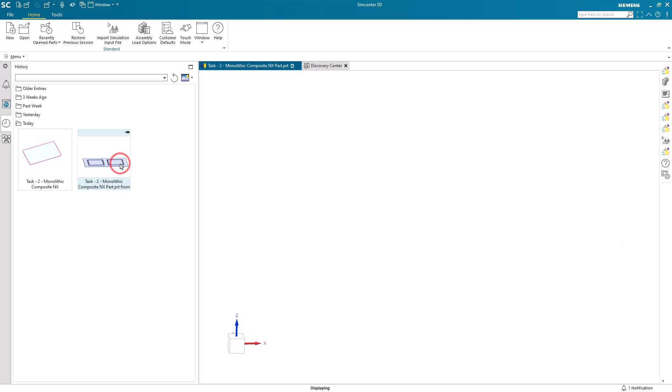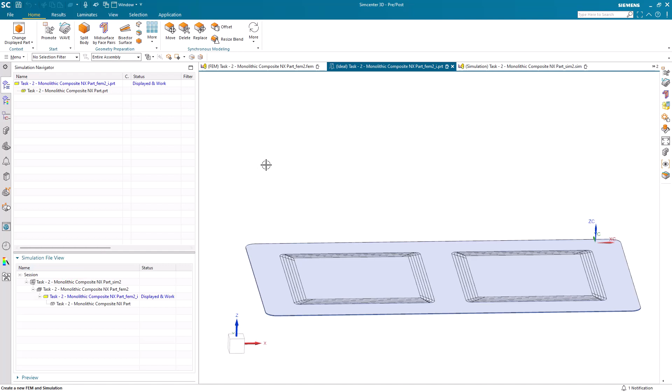Today we'll be importing plies from FiberSim onto a mapped mesh. We'll begin by creating our simulation files. We'll also create a test solution, linear static, and we'll begin in the idealized part where we want to create a surface that's divided by the ply boundaries.

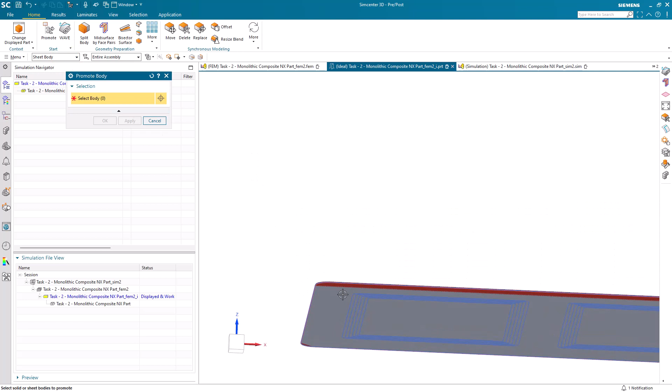So here you can see we have the plies being built up from the bottom in the Z direction. So what we'll do is we'll start with the bottom surface, and then we'll get some curves that we can use to divide up the faces by the ply boundaries. So here I'll use promote to get our bottom face sheet body.

And here you can see there are a number of curves that are also on that bottom face. There are actually a number of duplicate curves, and what we want is a spline which forms a complete perimeter. So here we'll use some detail filtering in order to select just the splines. That will reduce the number of objects that come up in our quick pick.

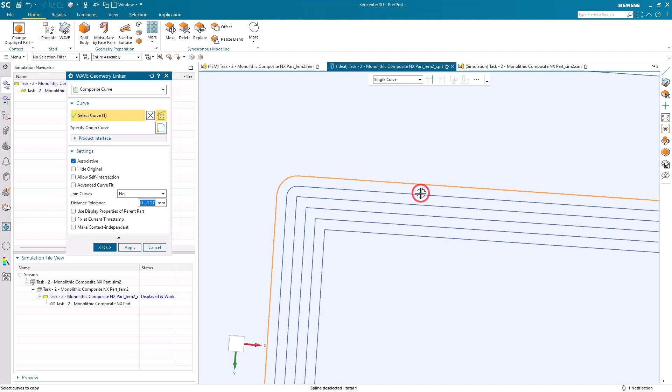So you can see there are still multiple splines here as well, but using the quick pick we can get the ones with the complete perimeter. Here I've made a bad pick. You can use Shift mouse button 1 to deselect. Alright, now we have the same number on the other side.

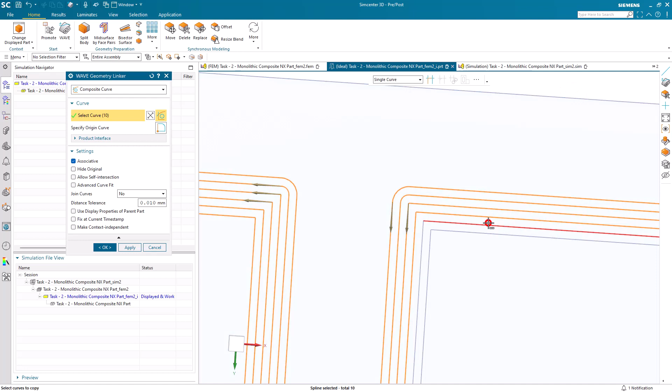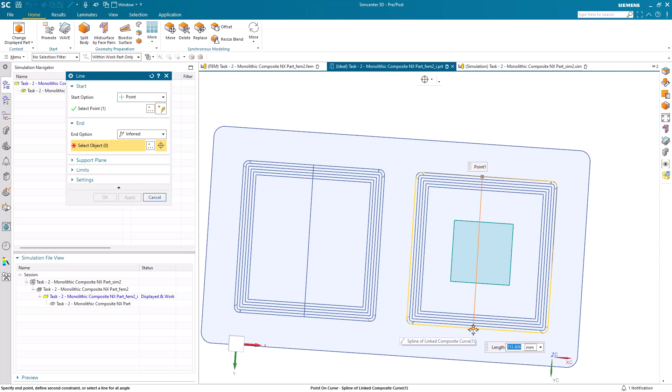Now to facilitate map meshing, what we'll do is we'll put in some extra curves to help us divide up these small ply boundaries into map meshable regions. Alright, so now we'll go ahead and divide the face. And we can box select to get all of our curves. And then we can bring this into our FEM.

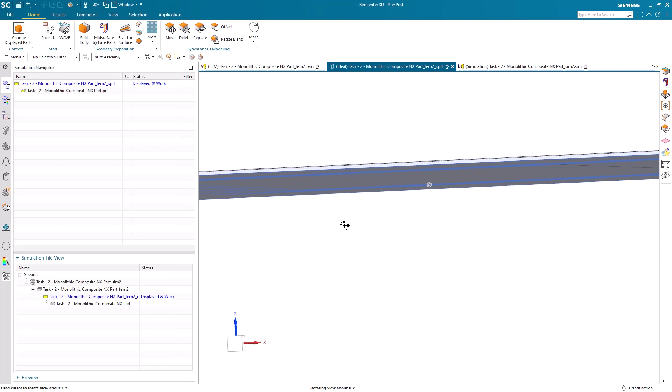Now one last check. We want to make sure that we're building up our plies from the bottom in the positive Z direction. In order to ensure that we're going to be building up our plies in that direction, we need to confirm that our surface normal is also in that same direction.

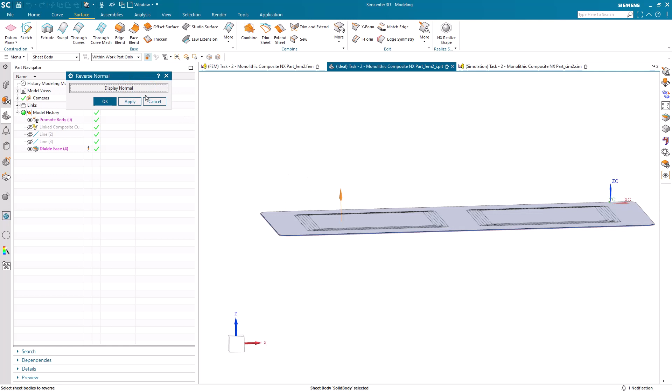And here you can see we can display the normal with the reverse normal command and hit cancel to not reverse it. If we hit OK, it would have reversed it. But we canceled out of the command, so the surface normal is going in the same direction as the Z-axis, which is correct. So we'll bring that sheet body into our FEM.

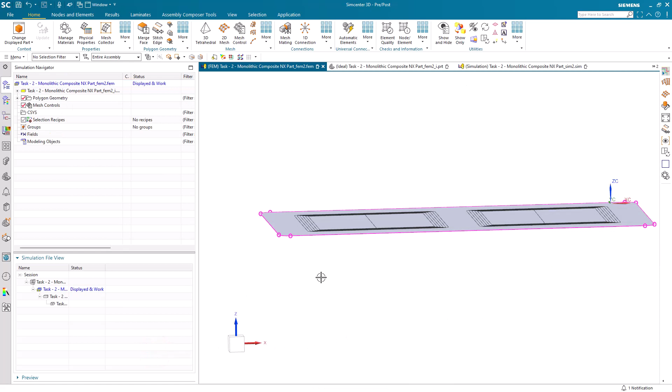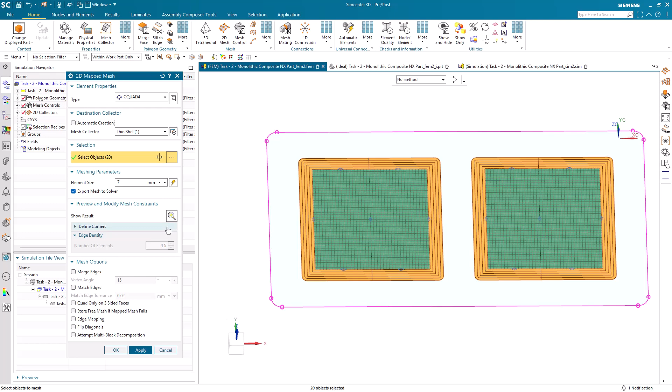With all of the ply divisions, we'll go ahead and create a 2D mapped mesh. And we'll start by mapping the interior, and we'll work our way out. And then lastly we'll put a shell mesh on the remaining face. We'll put all of these meshes into the same collector as well. Here I'll turn off the mesh control so we can better see the mesh, and that looks good.

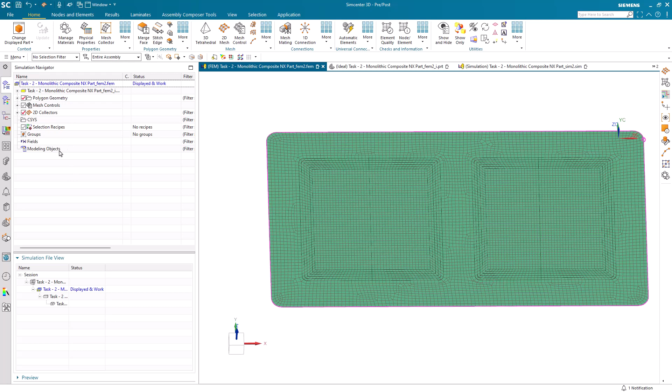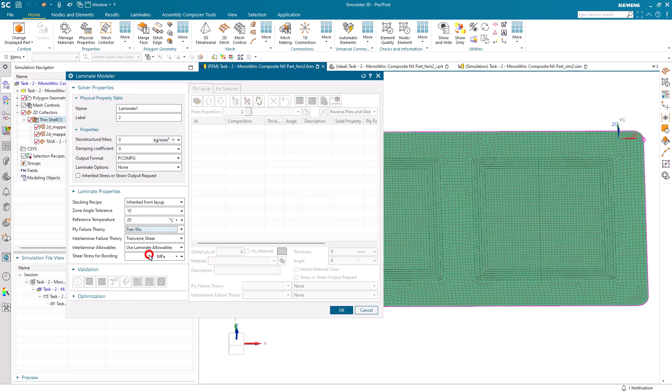Alright, so let's go ahead and edit our collector to set it up for our laminate import. So here we'll create a new laminate physical property where we're inheriting from the layup. We'll pick our favorite ply failure theory and shear stress for bonding.

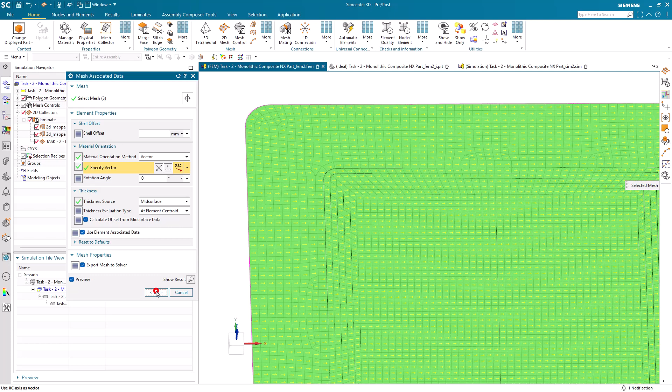Next we'll make sure that all of our material orientation vectors are consistent. Here you can see they're not. So let's go ahead and align them with the XC axis. This will help reduce the number of zones that are created after we import our plies from FiberSim.

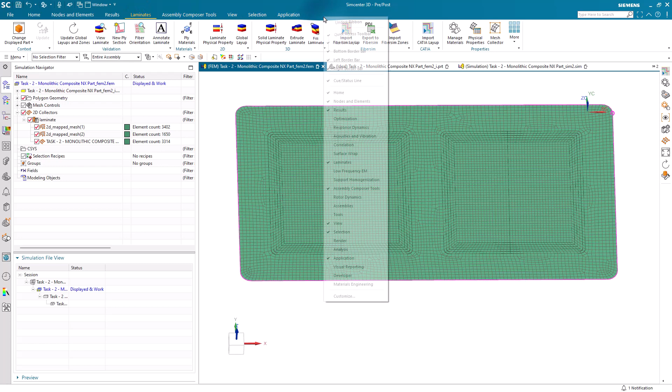Next, we'll go ahead and load up the materials that we might need coming from the FiberSim import. Next, we'll go to the laminate toolbar where we can import our ply deck from FiberSim. If you don't have the laminate toolbar available, you can right-click to get it available.

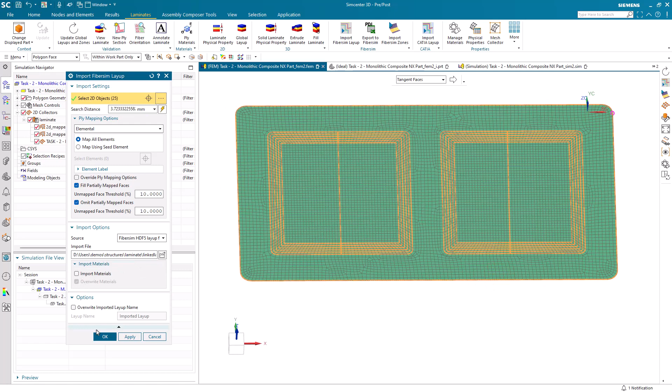Then we'll go ahead and import to all of our faces, and we'll also select certain options for fill partially mapped faces and omit partially mapped faces to ensure that our import matches our boundaries. Here we're not going to import the material properties, even though we are importing the material names. It will automatically match up those materials that we've already loaded in the previous step.

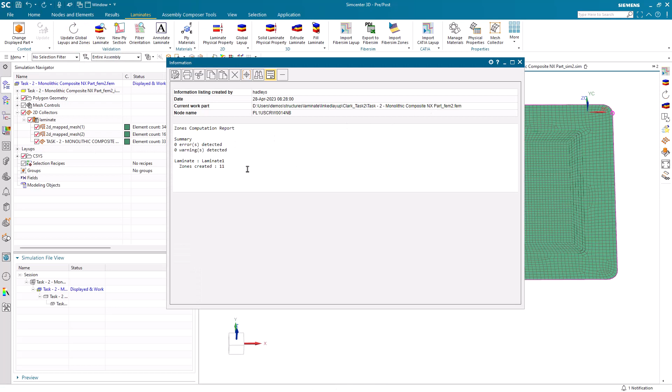Here you can see we've imported 17 plies, and we can go ahead and update our global layups and zones, and this will create 11 zones. So here we can view our layup that we just imported. We can see things like the global ply ID, the composition, thickness, angle, as well as what faces the plies have been applied to.

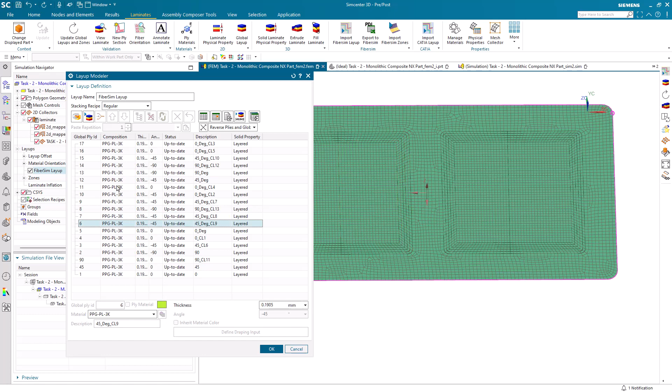Another way we can view this is taking a look at the zones. Each zone has a consistent set of plies that make it up, and here you can see that subset of plies that apply to that specific zone.

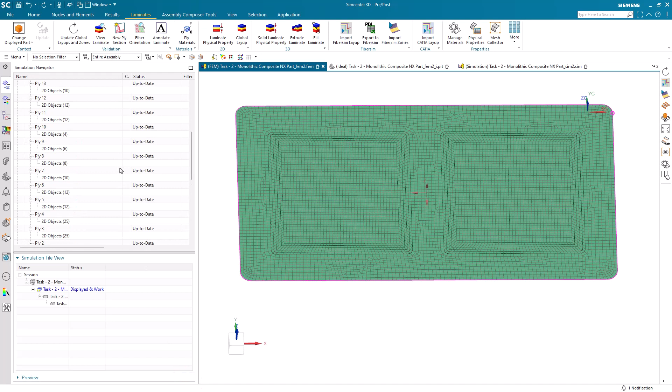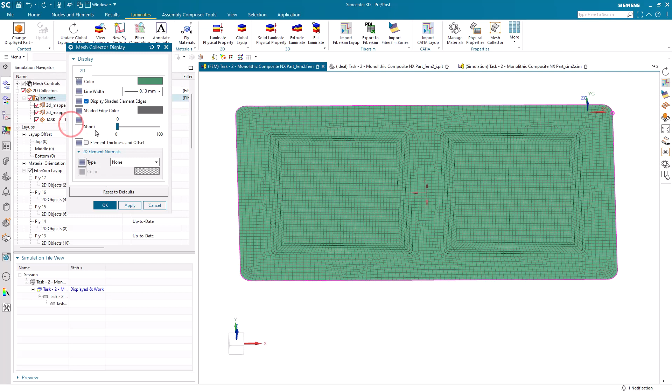Alright, next we want to make sure that we're building our laminate up from the bottom, so we'll set that as our default for our layup offset. So it'll be starting from the bottom, working our way up in the positive Z direction as determined by our face normal, which then determines our element normal.

Now here we'll try to take a look at our element thickness and offset, but it actually doesn't show because after making that change for our layup offset, we didn't update our global layups and zones. So let's go ahead and do that. And now we can go ahead and display the thickness and offset for our shell mesh.

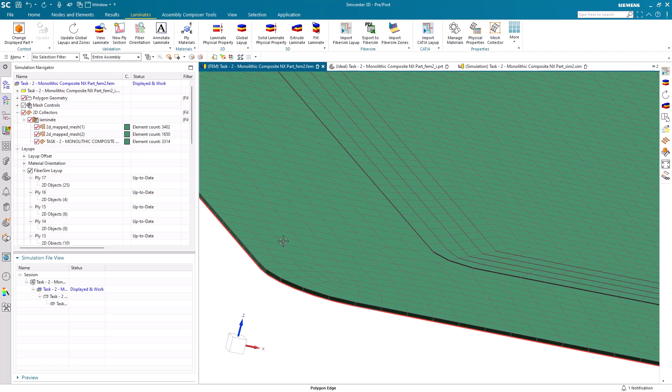Alright, so you can see it's being built up from the bottom. You can see the thickness, different regions there, and how it steps up for those different ply boundaries. Alright, so that looks good.

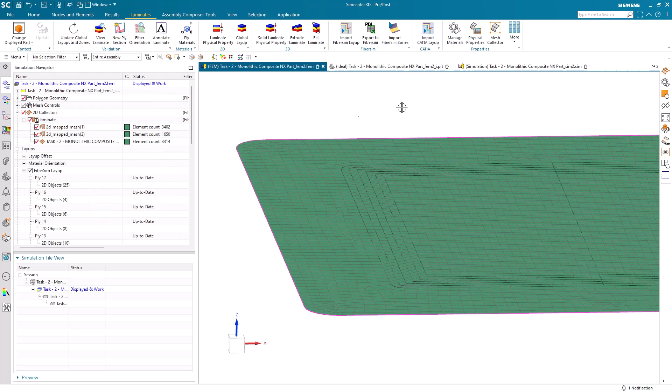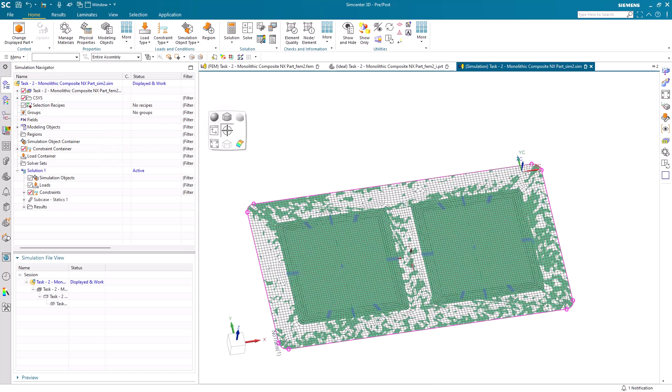Let's go ahead and set up a test solve. So here we'll go ahead and put a constraint on the model. We'll go ahead and select all of the perimeter curves there. And we'll also put a G-load on the part. Alright, now we're ready to solve.

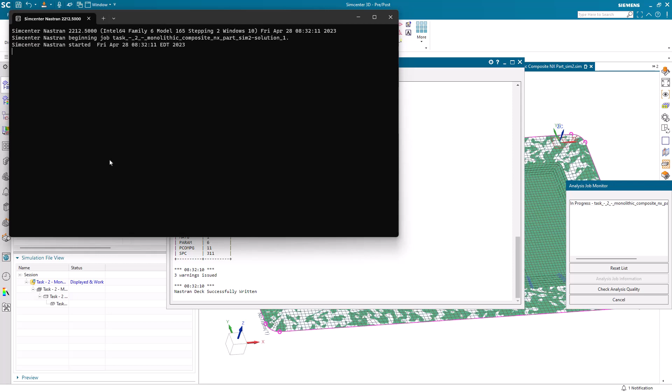And you can see this one runs in about 2 seconds. And we can see our results. And if we want, we can also animate them.